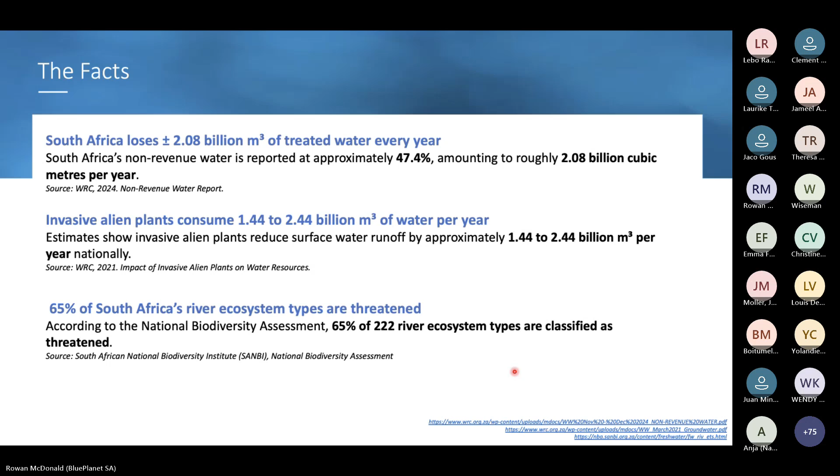This one I didn't have on my radar until I looked this up, but South Africa has lost 35 to 50% of its wetlands. So if we think in terms of our natural water purification and flood buffering, we've lost half of what we had over time.

Another well-known fact that's very integrated with a lot of these issues is 64% of the water treatment works are listed critical. That's back from the 2023 Green Drop reports. We eagerly await the new ones. It's anyone's guess if we're faring better or worse there. In our line of work, we only seem to see the bad ones, and pretty much doom and gloom in terms of the wastewater treatment infrastructure. So looking at those figures, only about 13% of municipal wastewater treatment was meeting compliance.

Microplastics, another big complex issue. We have a lot of primary issues to deal with in terms of wastewater and the environment. Microplastics are another demanding one. Sad to find that in a recent Vaal River study, microplastics were identified in 100% of sediment and water samples.

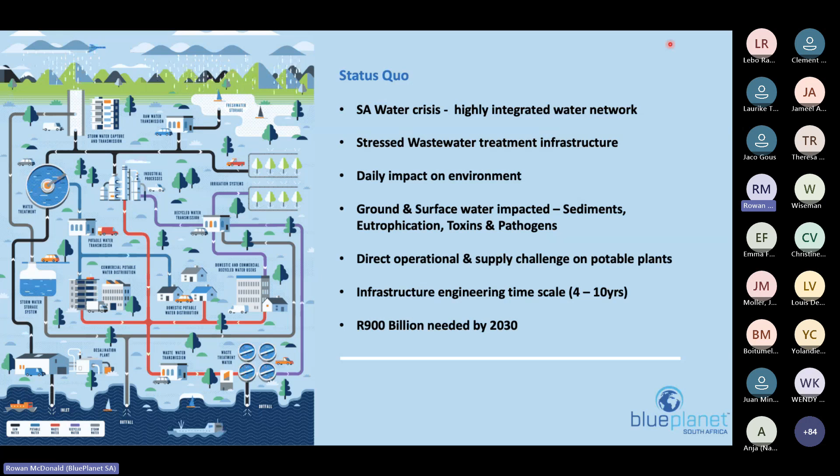So what's needed? Obviously, compliance and enforcement. There's some fairly healthy laws and regulation out there. It would be nice to see stronger compliance and enforcement. For water treatment plants, particularly wastewater treatment plants, we're looking at how do we intensify, how do you make the best of what you have without the long wait for those civil upgrades and massive 10-year construction plans. Is there something we can do in the interim while you wait for the major infrastructure civil works to be implemented?

We're needing solutions on the environmental and surface water side. The eutrophication and pollution of these lakes and dams is critical because of the scale of these systems. It's a challenge, but the cost of sitting back and watching it happen is even greater. So we need novel, rapid deployment, preferably low OpEx solutions to drive change in this water management cycle.

I believe another good approach is supporting decentralization efforts, both in terms of municipal water infrastructure, perhaps own build operate systems for the private sector, as well as a big drive to sewerless sanitation systems. South Africa is quite renowned for its innovation. We do have some great minds in this country in terms of engineering and science, and it would be nice to see more support in R&D and then an unimpeded path towards deployment. R&D is important. Establishing true success and getting validation behind various treatment approaches is important, without having too many stumbling blocks to actually getting these solutions in place and making a difference in the environment.

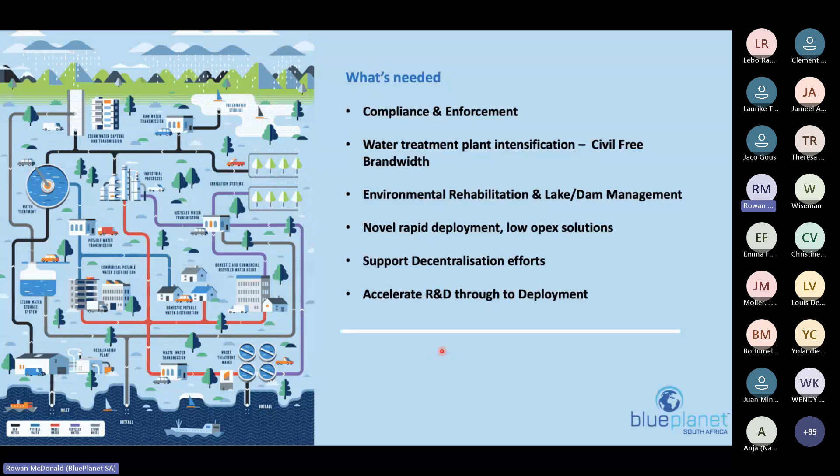So briefly on us, I don't want to make this a long story about our company, but there are some interesting points as to what we had to deal with and how we got to the point where we're working on some of the largest remediation projects in the continent.

So about 15 years ago, Dominic, who's on the call with us, our CEO, had come back from Europe into South Africa and had established some businesses and designs around packaged plants, wastewater systems for remote areas that could recycle water. Those packaged plants, very novel, great idea, worked really well, but occasionally you have severe challenges in terms of what the user base has thrown down the drain. And this is an issue that municipalities and cities deal with on a larger scale.

Debris, foreign objects, etc. are the obvious ones, but what's a little bit more hidden is the cocktail of chemistry that we all throw down the drains. Soaps, drug residues, pharmaceuticals, fats, oils, and grease, surfactants, and even hydraulic stresses from high consumption periods. So when you're in that space, you tend to have what we call bug salesmen come and provide you some magic biology in a bottle or a bag, say throw this into your plant or your lake, and the bugs are going to eat up the problems.

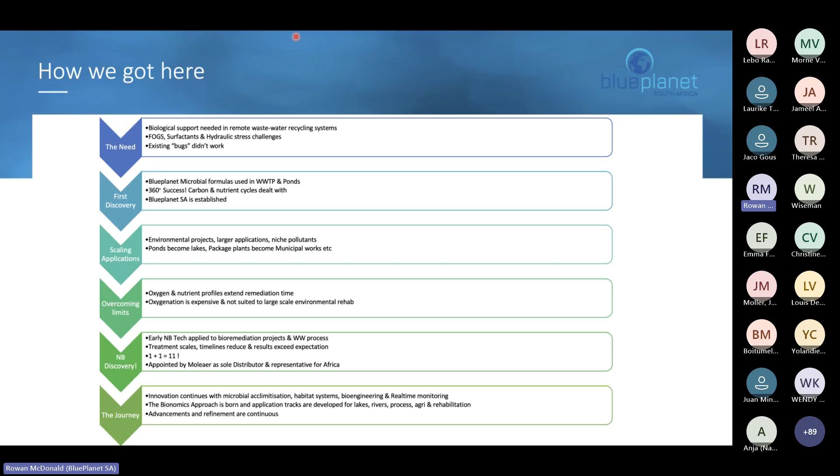So this led to larger and larger projects that were perhaps not feasible becoming feasible, timelines accelerated, OpEx budgets reduced, and the continued development of how we integrate these various technologies got to a point where we were able to start packaging them and still to this day further refine and advance on that theme.

So those learnings and intellectual property, which has been developed by Heiner and team in South Africa over the past decade, is known now as the bionomics approach. The ethos of which is less chemistry, more biology. The vast majority of issues we're tackling come down to biology and how we're able to steer that in the right direction, even in challenging environments.

Most of these applications can become more functional if they're aerobic and provided oxygen. We need to be smart with how we do that and efficient. These tracks are versatile and prescriptive, so no project is the same. But the principles and the core technology set are there, and how we assess, manage, and steer the outcomes of this is where that intellectual property is.

It's obviously very data driven from inception and study of a particular project or task right through to project monitoring, which will adjust the prescription, and finally the outcomes and rehabilitation reports thereof. So we've stacked that into a few key tracks. Bionomic balance is for lakes and dams. This is where we recalibrate the trophic status of an impacted water body.

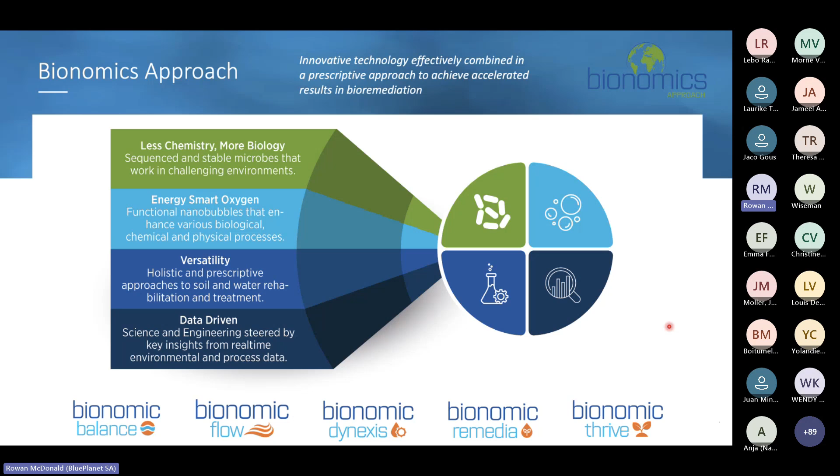Bionomic remedia is pollution cleanup in soils and water, so in situ remediation from chemical and hydrocarbon spills. Bionomic Thrive is these core sets of technology applied into agriculture and soil health. So the core technology stack, which is then custom integrated and prescribed to an application behind this, is our microbial technology, which is known species. We know their function, we know their habitat, and how to steer them into an application for soil, wastewater, agriculture,

or similar. Nanobubble technology, which we'll get into, is the accelerator to all of this, where we can do gas diffusion and create these nanobubbles which stimulate the microbiology. Bioengineering, we bring this particularly into river and lake solutions and pollution control, anything from biologically active weirs, floating wetlands, in situ bioreactors, creating massive amounts of surface area in systems so that we can have beneficial microbial habitat to

restore biodiversity. In terms of the data around these projects and reporting, we work with everything from sonar scanning lake beds and sediment and doing hardness and vegetative mapping through to real-time in situ monitoring in pipe, in plant, or in lakes and rivers, including sediments, drone imagery and surveys, laboratory analysis. We bring this all into a dashboard for assessment, informing the direction of the project, and ultimately the final reporting. Data is certainly key.

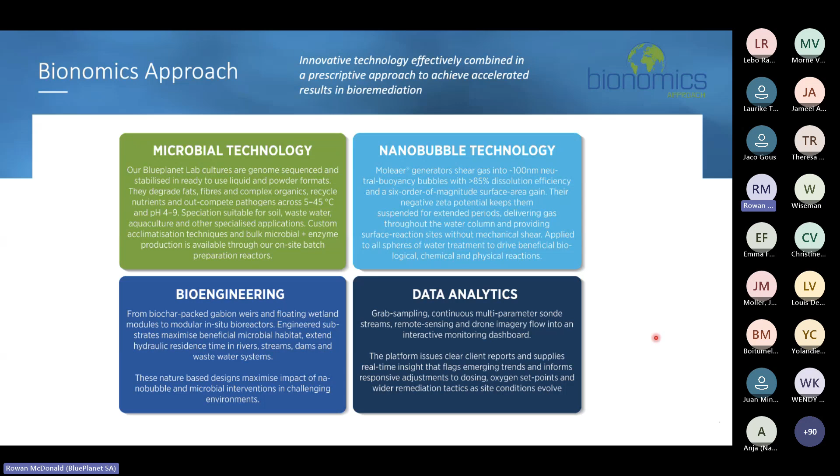So the kind of work that has been achieved with biology and nanobubble oxygenation is anything from large municipal plants that have suffered decay and degradation or not meeting compliance, river systems that have received pollution for a long time and need rehabilitation, large-scale lake eutrophication management, agriculture, and more. We'll dive more into some specific applications later.

Okay, time for a little bit of schooling. These are very complex topics, and I'm sure I have a very mixed audience of skill sets here, where some of this might be well understood and some less so. I'm going to do my best to keep it short, but I'm going to raise a few pertinent points around what to expect from microbial remediation, what to look out for.

So just briefly, what we believe is important and why we've had so much success in the market with our particular product set is we are working with pure cultivations of organic bacteria. We know what they are. This is not some concoction or cocktail that's been created years or decades ago that keeps on fermenting. These are individually identified, sequenced, and libraried microbes.

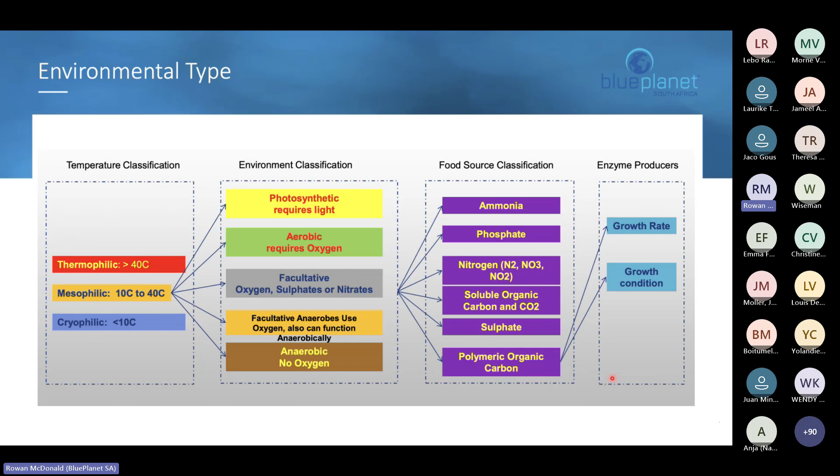So I'm going to get into enzymes now, because quite often with microbial products, or what people might refer to as bugs, bioenzymes, there's a lot of confusion here. So bacteria are living cells that can consume or cycle waste. They replicate and grow if the conditions are correct and if the food source is available. An enzyme does not reproduce. An enzyme is actually the production of a bacteria when there is not soluble food available.

So if you think about the sediments in a lake or sludge in a lagoon system, you have sort of coarse food, that's the sludge and particulate matter that you can see. A bacteria cannot actually make that disappear or eat that. A bacteria doesn't really have a mouth. What the correct bacteria in the correct environmental conditions will do is produce an enzyme that does that first breakdown and solubilizes that food source for the bacteria to then take over.

So if you only apply an enzyme, you will start solubilizing and releasing carbon and nutrient. But what happens next if you do not have supporting bacteria to then complete that process? So just a word of caution, be careful with enzyme-only solutions, because you're not completing the cycle. In fact, sometimes you can have quite severe spikes of nutrients, which create further issues.

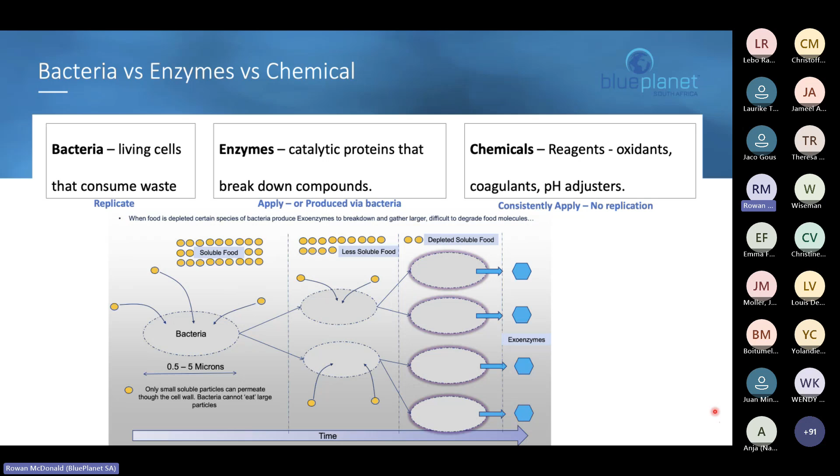We then have the Bacillus army, which does a lot of our organic degradation and carbon-based work and produces some very useful exoenzymes. Licheniformis is a denitrifier to complete that ammonia-nitrogen cycle. And very importantly, the nitrifying species.

If we only had carbon degraders, if I can put it that way, you would stand to have initial degradation, release a lot of ammonia nitrogen into the system, and then what else? So some of these products could create ammonia nitrogen issues. Fortunately, we've got the speciation to then deal with that. Nitrifiers are notoriously slow growers.

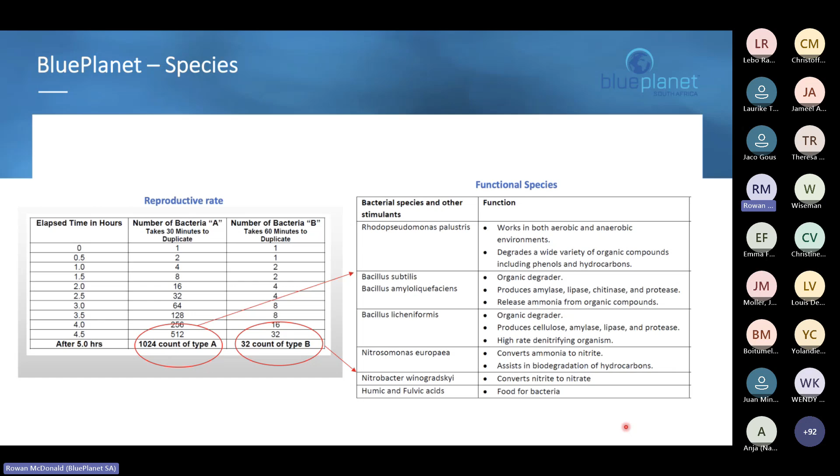So how do you put this to work in the field? Ready-to-use liquid products. This is an easy platform. You get to apply liquid to wastewater processes, irrigation systems, surface water systems. And what we've learned over time is obviously the larger the project becomes, the more biological support we need. So quite uniquely, we offered the Southern Africa market the ability to batch prepare on site. So this is how we scale up this biology.

So we build a bioreactor on site and essentially use the liquid products and some powder products as an ingredient to then grow and multiply the amount of microbes that can be applied to a project. So we're not transporting water around the world or around the country. We're able to do that rapid growth on site, and even acclimatize microbes to specific conditions. So if we're dealing with pH extremes, salts, hydrocarbons, or other toxins, we actually train this microbial community to tolerate and work in that environment. So we customize it to the field application.

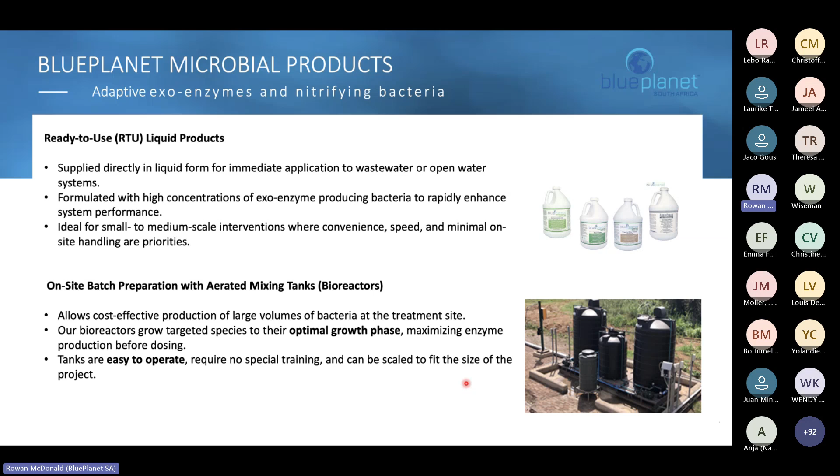So I'm sure a lot of us have had some sort of exposure to purchasing bugs or bioenzymes or some kind of bacterial product. You may have had success, you may have had failures. Unfortunately, there are quite a few failures with these products in the market.

What I think is misunderstood or not regulated in the marketplace is an understanding of what is in that bottle or that pill or that tablet, and how to get it to work. So my advice is, if you're looking at something to use in a particular application, get an understanding of what the species are.

Any service provider worth his salt should be able to give you a list and an analysis of what those species are. Hopefully they explain to you what each of those species are for. If not, you could do your own research on what the functions are. Are they standardized? Are they part of an internationally recognized genome library? Have they been sequenced? Or are they some sort of GMO or unknown?

We would apply caution if there's some unknowns there, or some unexplained species, or something foreign to your particular country or application. So the simplest questions are GenBank numbers and biosafety levels. What is in that bottle, or what is in that powder or tablet? Other questions might be around the pathways.

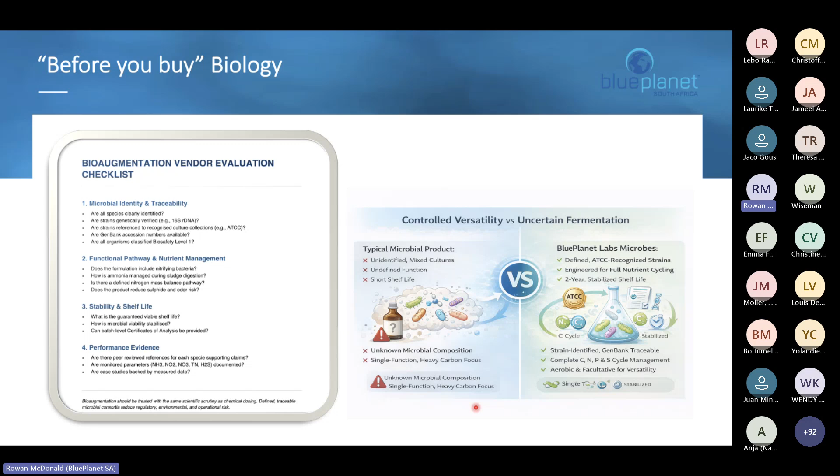All right. Sorry if I try to condense too much into that one, but I'm trying to cover a lot of material here. So that's a focused look at the world of bioremediation and bioaugmentation technology.

There's obviously a lot more complexity to it, but I think what we've shown in field work in South Africa, work with universities and municipal departments, is it can work if you understand your expectations, your environment, and your species choice. Getting those things right is critical. Managing the expectation and supporting the biology. And it's not just about throwing lots of unknown biology at a problem. There is some finesse to it.

All right, so nanobubble technology, this is an exciting one. This is my field. I get very, very passionate about it. This is what stepped up our game and our scale in terms of remediation. The Bionomics model and the use of nanobubble technology has now moved on to establish Blueplanet Germany 3 years ago. We're tackling challenges in Germany, New Zealand, other parts of the continent too. So the integrated approach of how we work with biology and support it with nanobubble technology has really grown leaps and bounds.

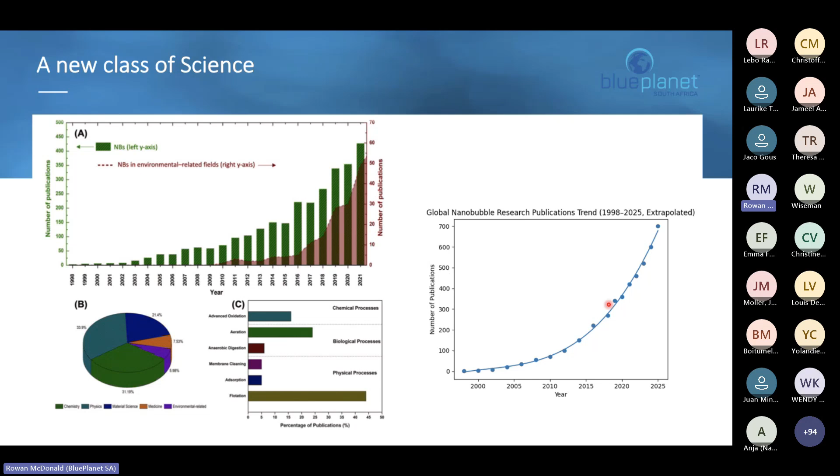A lot of the foundational science is established, and we're more and more learning about niche applications in water and soil. The graph on the right is actually just an extrapolation I did because I haven't got an updated graph here. But as you can see, the science and research is really compounding.

I'm going to do a quick lesson for those who are not familiar with oxygen transfer or aeration. If you do want an aerobic process, or adding oxygen to an application is going to assist that biology, there's a few different ways to do that. The most common is large mechanical aerators that sit at your wastewater treatment plant. Huge amounts of energy, not very efficient at getting oxygen into water.

The next advancement on that is some kind of diffuser. If you can picture your aquarium tank, you've got some sort of bubbling air stone, and those bubbles rise up through the water column. The amount of time those bubbles are in that water column is your chance to diffuse that gas into the water. Deeper water helps because the bubbles are there longer, but you're using a lot of energy and you're always having bubbles pop out. So diffusers are generally only getting about 4 or 5% of the gas into water per meter, and there's a lot of wastage in that.

Cones, or Speece cones, are something the aquaculture industry uses. Very complicated to design, extremely power hungry, and not something you're going to see in a wastewater treatment plant or environmental application. Spargers and venturis, these are better. Some of the most well-designed venturi systems I've seen are hitting 20 or 25%. The rest of that oxygen is wasted back to atmosphere again.

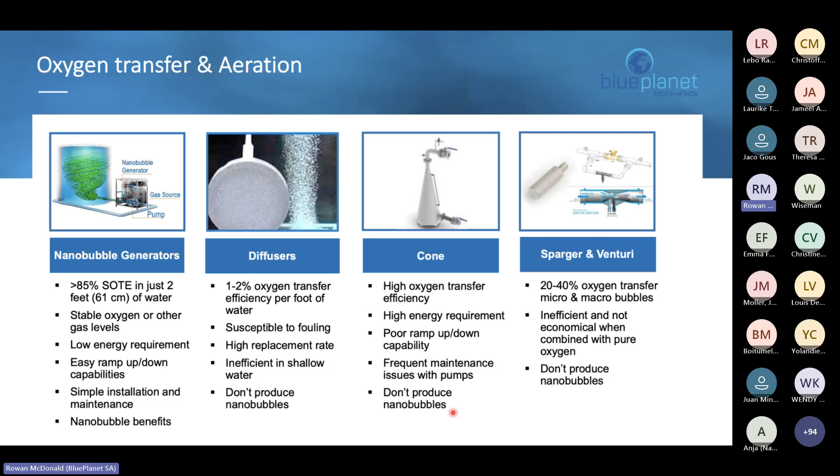Nanobubble technology gives us the ability to dissolve over 85% of that gas into liquid. We're doing this with low energy, simple maintenance, and across a wide range of applications, highly scalable. So efficiency is one of the reasons we use this technology.

To scale this, we're familiar with macro and micro bubbles. Micro bubbles are going to be in your soda, in your Coke, and they will eventually pop out of that liquid. Ultrafine bubbles create a sort of cloudy water. These are much smaller bubbles. They hang in that water for a little bit longer, so they have a better chance of trying to transfer their gas content into the liquid.

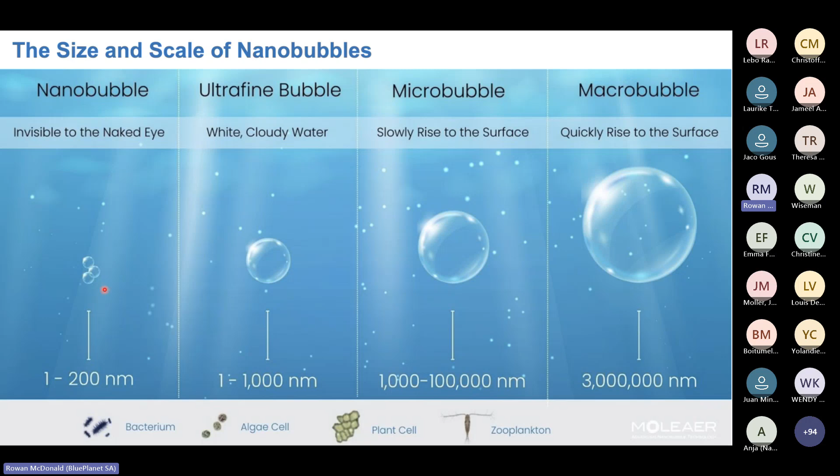So why is that interesting? One of the most defining behaviors around nanobubbles is the fact that they are neutrally buoyant. They don't actually rise out of water. So that increases our ability to have gas retention and very efficiently get oxygen or air or some other gas into that liquid. They're highly stable. They don't rise. They have a hardy surface, high internal pressure.

They are electrochemically active, negatively charged, and hydrophobic. So I'm throwing a lot of terms around here, but really what it means is the bubbles repel and push apart. They will not join up and become a larger bubble. They mobilize really well throughout the water system, the tank, the lake, or the application. They're happy to be at depth in a system.

So if we look at lakes or lagoons where you have sludge and sediments at the bottom, that is typically an anoxic process down there. It's slow, it produces smelly gases. By introducing nanobubbles, we can turn those environments into microaerobic environments, accelerate the decay of that organic matter, and switch off the modes that produce those noxious odors.

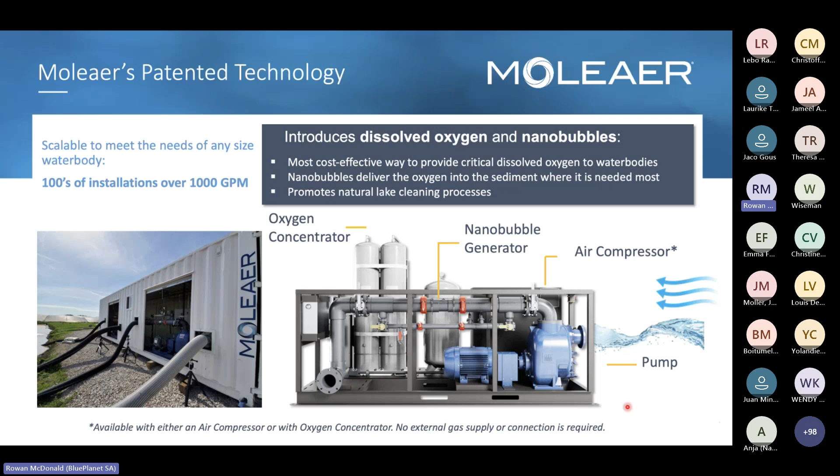To that core, we connect a gas source. This could be air, it could be oxygen produced on site, it could be tank oxygen, ozone, hydrogen, nitrogen, CO2, whatever that gas is that we need in that process. We introduce it there, and we get this dissolving of gas and production of nanobubbles. So the size and scale of this will vary based on application. But in terms of efficiencies on the energy side and mechanical side, it's quite incredible.

So that technology is really doing two things in water management. It is dissolving your gas of choice hyper efficiently, 85% plus transfer. That is quite often a reason to introduce this technology on its own, for its ability to provide that gas very, very efficiently.

Secondly, and possibly more importantly, is the production of these nanobubbles, which behave more like active particles. We're able to enhance and manipulate separation processes, accelerate biological function, strip out contamination, sequester inhibitory compounds. There's a laundry list of what these bubbles are doing beyond just their gas provision. Their physical traits, behavior, and electrochemical reactions are immense. So we've got to remember this is not just about oxygen or not just about a bubble. It is about the way these bubbles behave and how they're able to enhance various processes.

The other thing that helps nanobubbles be so functional in biological and separation systems is obviously the scale, which results in this incredible interfacial surface area. What I mean by that is the interaction potential, the ability to react with a fine contaminant, a solid, a nutrient, a bacterium, a sediment. There's so many of them, and they are actively charged. They want to interact with the components or the stuff or pollutants we have in the water and or soil.

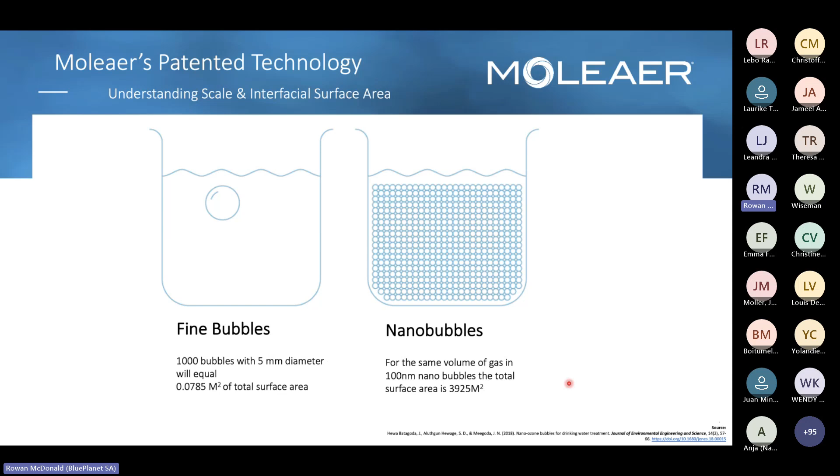So this speaks to the efficiency around the gas, but so too then the physical, chemical and biological interaction potential you have in a particular application. So the scale completely changes here. We're doing essentially more with less in terms of that gas and mechanical input.

So the world of nanobubbles is very exciting. I would encourage you to look up a few papers, particularly in your specific fields. Please do reach out to Hannah or myself after this if you've got questions for your field. And chances are there's probably a paper on it somewhere by now.

It's used, like I said, even up through to the medical industry and drug delivery, which is more emerging. But we're seeing very interesting applications like surface cleaning, where the hardy nature of that bubble itself is actually able to scour and clean a surface like a tank or pipe or food material without chemistry. Just using an air or gaseous bubble is actually giving us the cleaning effects. Water mobility, dispersions, a lot happening.

We tend to focus on its use for gas transfer, microbial process and stimulation, and what we can do in separations. Because really, these are the real drivers behind water and soil rehabilitation.

Right. I'd like to talk a little bit about the water cycle and surface water. So we've got a lot of impaired water bodies, not just in South Africa, but even Europe and US are also facing this crisis. Man-made activities have sort of overwhelmed the natural cycle in these water bodies. We're seeing it happen in real time in the country, things getting worse, but it's also been happening for decades.

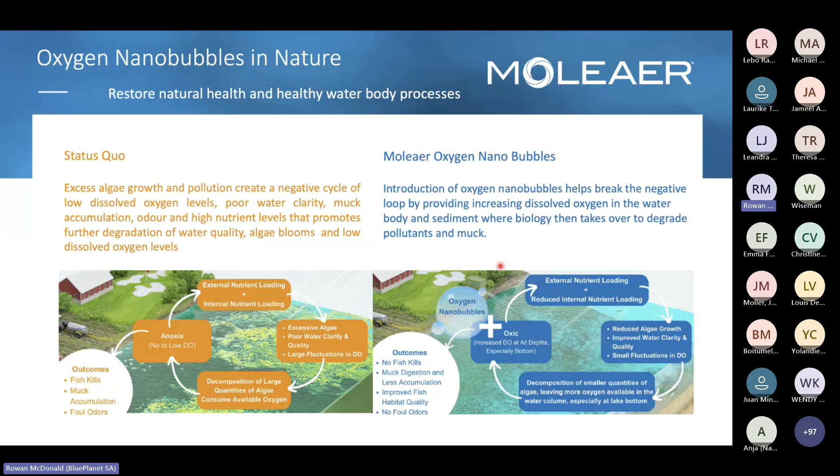Fish waste and decaying leaf matter. The biology is there in a healthy system. Our surface water systems have lost that ability. So just briefly, key nutrients, the nitrogen and phosphorus challenge, this is the main one. So you have all of this coming in on a constant basis.

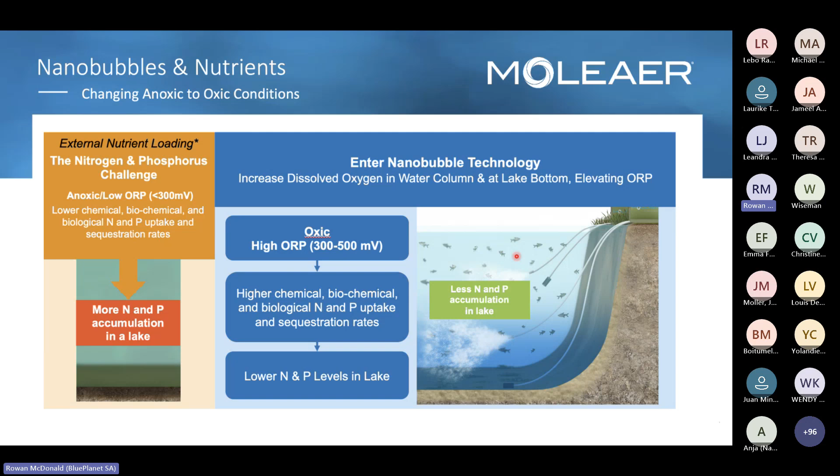By keeping that water body oxic with a healthy redox level, we're able to enhance the biological cycling of ammonia nitrogen and support phosphorus uptake through biology, but so too sediment and lock up phosphorus levels. So phosphorus is a persistent thing. What we want to do is get biomass to take it up, and what's not taken up, you want locked up into the sediment. You don't want it coming out again. This is the way a healthy lake works, and this is what nanobubble injection restores in a lake system.

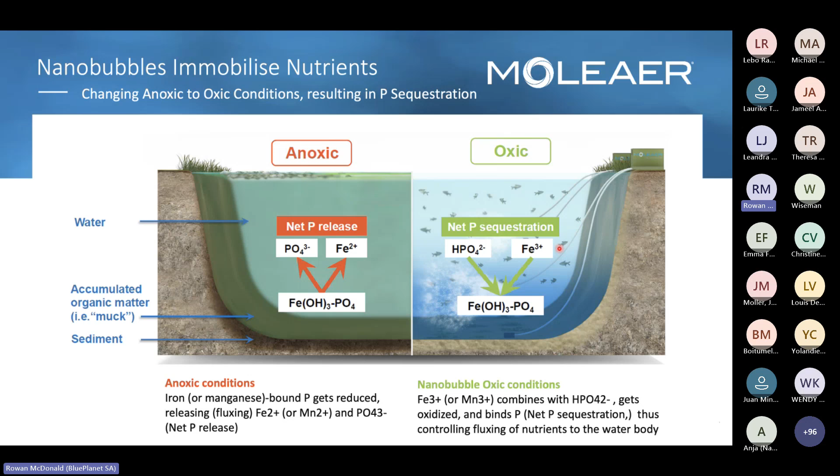So yet again, just talking about back to sort of biology, if you were to throw a lot of unknown enzymes or bacteria into a system, you might start breaking down organic matter and releasing ammonia and phosphorus. That's then going to trigger a bad cycle of algae blooms and invasive weed growth. If we keep things oxic throughout that water column, top to bottom, through the use of oxygen nanobubbles, we will naturally sequester and reduce those phosphorus levels and cycle the ammonia nitrogen.

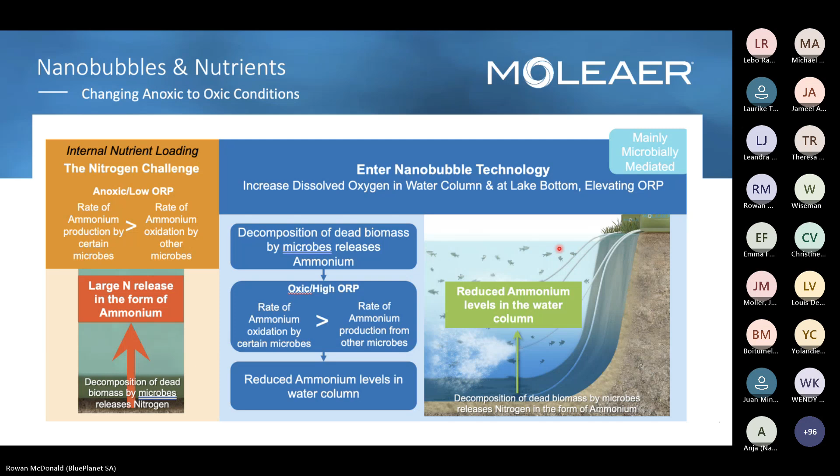So we give the biology the helping hand it needs, the tools it needs, sort of the paycheck for the bacteria, and they're able to get to work and do what that system is supposed to do, which is take that ammonia and ultimately gas it off as nitrogen. So we're able to do this in virtually any scale water body with shore-mounted equipment, supporting microbes.

It's about breaking that cycle, turning back the clock, dealing with the issue from sediment to surface. Sediments are a key contributor to our issues. Putting an aerator at the top or throwing some reagents into the water and sort of bringing all that sediment up can be very, very problematic. We've got to take care of that water body from sediment to surface and really just adapt and restore the function that water body is supposed to have.

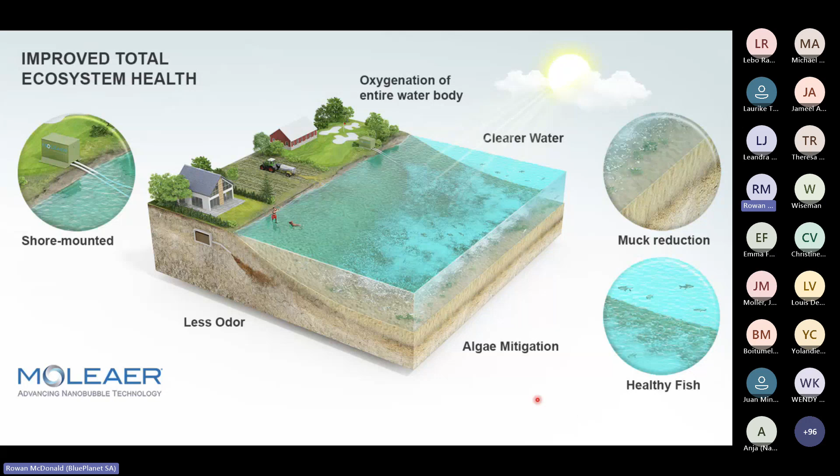All right, moving on to a little bit of wastewater quickly. We see obviously a lot of challenged wastewater works. If you look at a wastewater treatment plant that was designed 40 years ago, they might have designed that plant for 400 or 500 COD, milligrams a liter, and maybe it was designed for 20 megaliters a day. That plant is now receiving, for example, 1,000 COD, and maybe it's not even hydraulically challenged. Maybe it's still running at 20 meg. But our wastewater as humanity has become more difficult to treat.

The reason it's become more difficult to treat is our chemical consumption. We look at not only food and manufacturing industry, and the sort of cocktail of chemicals they need to use to disinfect and keep things clean, but so too our own homes. We can think back to the days where we might have had a bar of soap at the sink or the shower. Now everything's liquids. My wife has got 8 different lotions and potions for hair and body, and these are all going down the drain. They've all got surfactants in them, and they upset process.

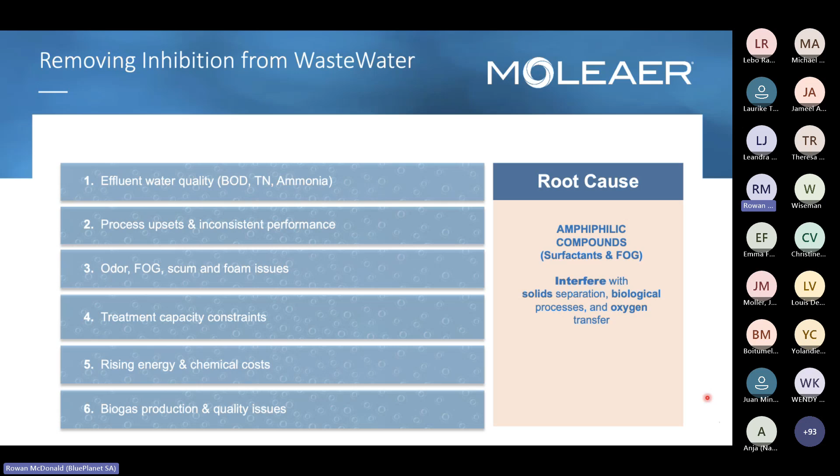A surfactant's job is to encapsulate and remove soiling. That's the opposite of what you want happening in a wastewater treatment process. A disinfectant's job is to kill bacteria. That's the opposite of what you want happening in a wastewater treatment process. So the water has become more difficult to treat. The biology is sensitive to this, and the plants are not operating the way they're supposed to.

We learned we can use nanobubbles as a sacrificial particle. We inject nanobubbles into raw wastewater before the biological treatment process starts. A surfactant has a hydrophilic head and a hydrophobic tail. The nanobubble acts as a collector of these compounds. It reaches the destabilization point and ruptures that surfactant. So that surfactant now does not impede the bugs in the biology that are going to do the work for us. The surfactants also reduce aeration efficiency.

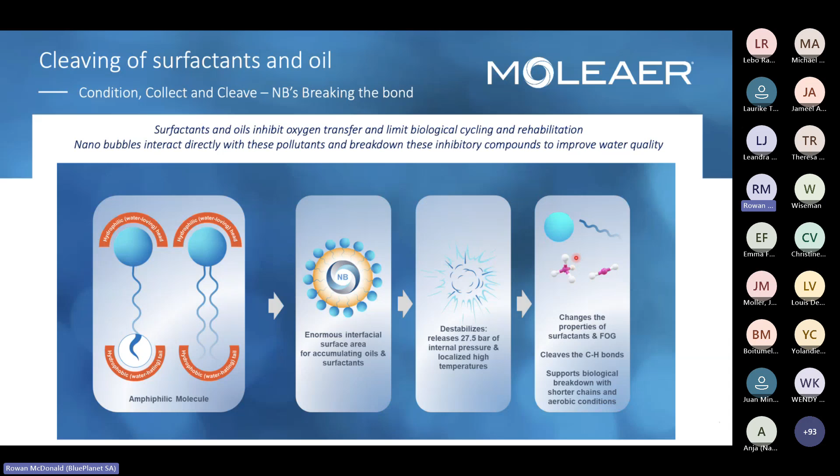So if you have an under-aerated or low DO wastewater system you're struggling with, a lot of the time, the culprit is actually the surfactants and FOGs that are in the system, impeding the transfer of oxygen to biomass. Yet again, nanobubbles get to work, sequester that issue out for us so that the rest of your process is able to work the way it's supposed to.

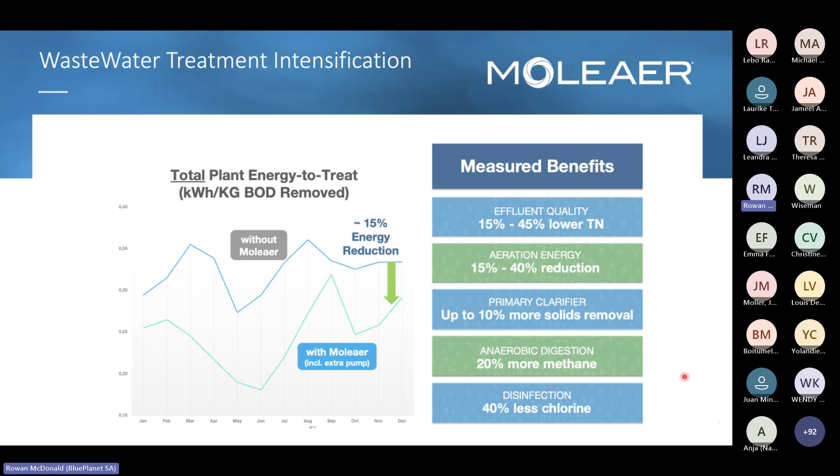What that means in industrial and municipal wastewater treatment is better total nitrogen removal, potentially up to 40% less aeration, better solids removal, better separation, even anaerobic digestion. And finally, we're seeing less chlorine use at the tail end of these plants because those surfactants were actually quenching chlorine consumption right at the end, because the majority of the surfactants will pass through the process.

Nanobubbles are getting adopted in irrigation and distribution systems because they manage biofilm and scaling. So these little bubbles are happy to line up on surfaces. They react with biofilm accumulation in pipes so that you don't have that fouling. This helps farmers and irrigation schemes a lot. Similar story with scaling.

Soil application: reducing water surface tension with these bubbles, getting better permeability through a soil profile. So Heiner might speak to this when he talks about some of our hydrocarbon work, where we see this in agriculture, we see it in remediation work. We're able to mobilize water, get water to transport through soil better, break up compaction. So you get better water use out of that and better transit through to the root zone.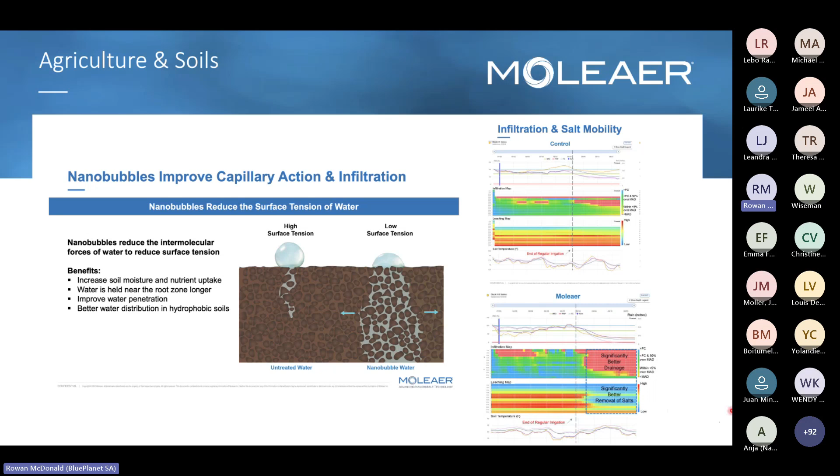Nanobubbles will collect, mobilize, and sort of relocate salts. So if you have compaction or ionic stratification in soil profiles, we're seeing success with nanobubbles breaking that up and relocating or immobilizing those sort of salt accumulation issues.

All right, on to some case studies. Hartbeespoort Dam. I think some of you might have heard about this project. I will give you the condensed version. Magalies Water was contracted to run a multidisciplinary project. One portion of the project was looking at different ways to manage the internal and external nutrient levels of the dam. Obviously, the big visual case for everyone is the hyacinth coverage or the algae blooms. Root cause is obviously the nutrient. So what novel ways are there to deal with nutrient? So enter the Bionomics approach by combining nanobubbles and the correct consortium of microbes.

Importantly, this was a pilot on a particular zone of Hartbeespoort. Unfortunately, the public was expecting or hoping that one small pilot was going to fix the whole dam. That was never the case. What it has done, though, is given the utilities and powers that be the confidence in a long-term study to see the change, see the impact.

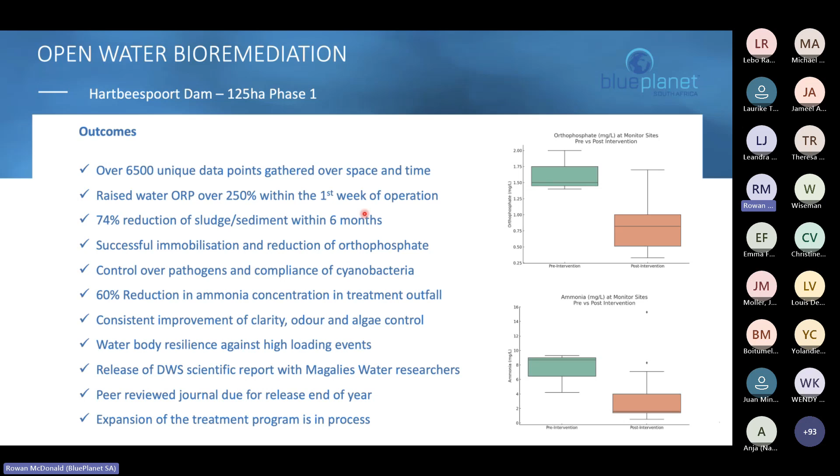So what we did over that period was achieve measurable reductions in key nutrients like phosphate and ammonia. An immense amount of data was built up. We saw very encouraging changes to redox and dissolved oxygen. Just jumping back, we actually saw major reductions in organic sediments, as much as 74%. So giving us more water column and less nutrient flux. And this is all still biologically linked. At the end of the day, we're sort of detoxifying that water, getting the biology to work again, and arresting the internal nutrient release issues.

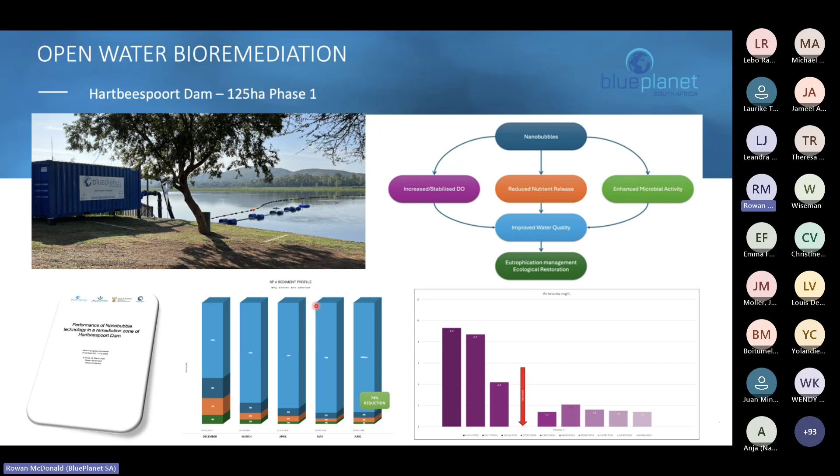The findings of this actually exceeded our expectations in terms of the zone. We have seen overall improvements right through to the dam wall, despite the incoming systems actually getting worse. So the Crocodile River has gotten worse, not better, according to Magalies Water's data. But despite that, we've still seen positive trends in that water body itself. And pleased to say the pilot is continuing. There will be further expansions on this program into Hartbeespoort.

We do need to have context for how large and how complex that system is. It is not going to change overnight. This is a program that spans many, many years. It could condense in time with additional inputs and budgets, but the expectation is this will be a program that exists over many years.

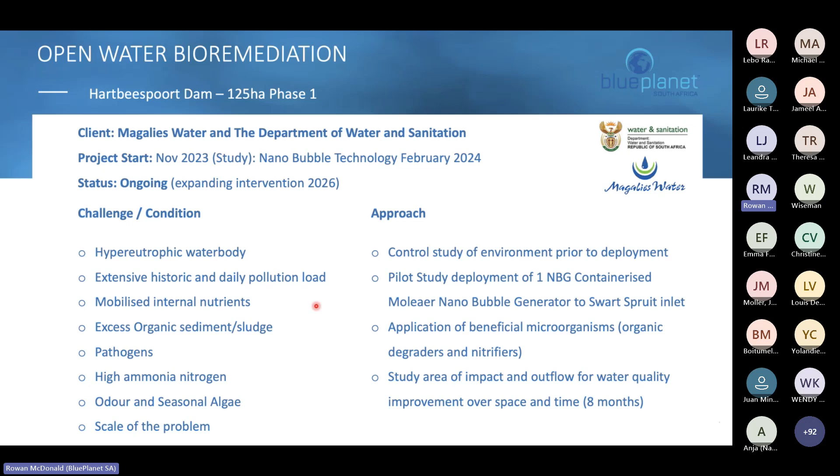Roodeplaat Dam, this was an incredible project. We kind of got approached by World Rowing. Roodeplaat was set to host the first World Rowing Masters Regatta on African soil back in 2023. And there are 2 wastewater treatment plants directly impacting the dam. It's got a long history of eutrophication and problematic algae, and water quality spiraled out of control leading up to the event. So about 3 months before, we were contacted to say, can you pull a small miracle off here?

There's 3 months to go. And they were failing on E. coli and various other parameters. And that prestigious event that the city of Tshwane and the country was very excited to hold was under threat. Blue Planet got to work. We sort of threw everything we had at this, ran a really, really intensive program.

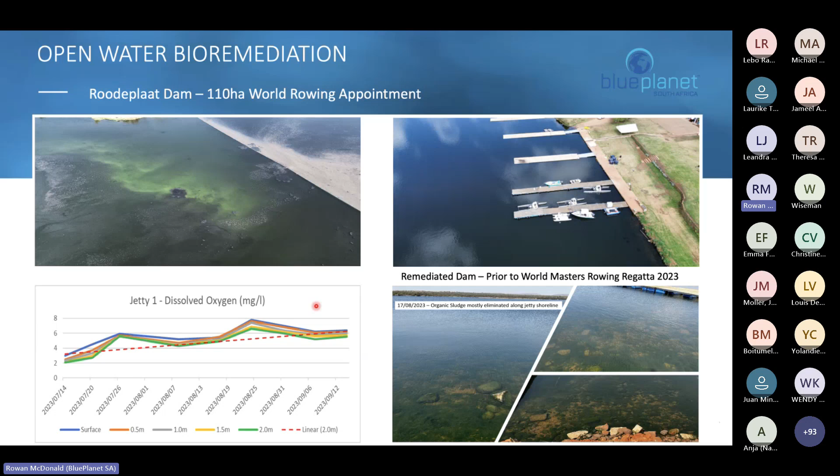I think it's managed to give Heiner a few gray hairs as well as everyone else. It was sort of round-the-clock effort for weeks and months on end. And yeah, managed to save the day despite huge activated sludge ingress from a wastewater treatment plant. It was the height of load shedding, sludge spills were occurring, everything was against us. But combining nanobubble technology and the right consortium of bacteria and enzymes, we were able to get things in control and get them in compliance for that event.

So yeah, that was sort of the first big public project that gave people some awareness around the technology and the approach, and things have grown since then. So yeah, that was one of these sort of short-term interventions. Unfortunately, that was limited to funding. We contributed, some other consortiums did, to try and get that done. Unfortunately, budgets for continued management of the dam as a whole have not yet come about. So the treatment effects were limited to the event, and to this day are sort of around the jetty zone.

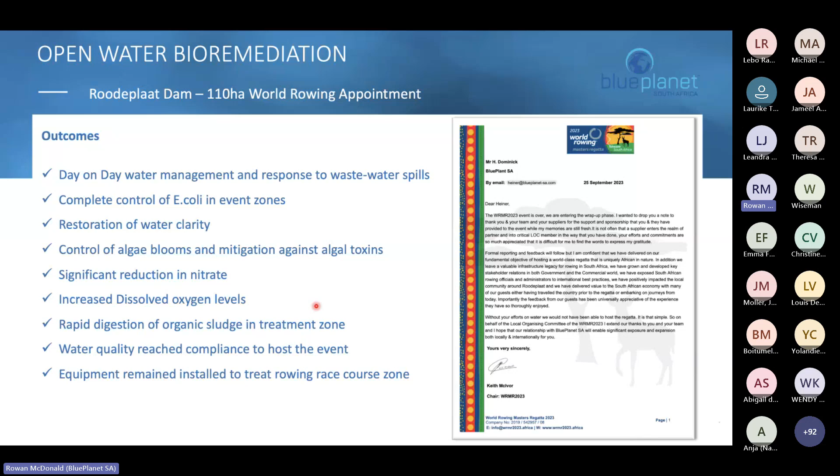Sorry, Rowan, you asked me to give you a 15-minute heads up. All right, thank you. Thank you very much.

All right, so another interesting project. Lakes and dams are one thing. You have a certain amount of retention. What if you have a flowing river? A really, really toxic soup of sewage and chemistry. This was the case for Greenways Golf Estate in Strand, Western Cape. I arrived to this middle picture. The Soet River is severely impacted upstream by an informal settlement that particularly sprung up over the COVID period. There are no services there, so the river is used as a sanitation dumping ground and debris dumping.

This then carries on down through some underground culverts. It affects a few communities before that, and then pops out at Greenways Golf Estate, which is a coastal golf estate. Picture yourself retiring, going down to the coast, setting up home in a lovely golf estate. You take your grandkids fishing in the river. Life is grand 20 years ago. Over about the past 6 or 7 years, this river has turned into a septic, very sort of dangerous system. Residents were having to close up keyholes, and were putting towels below doors to prevent the noxious odors coming into their homes. The river was completely dead.

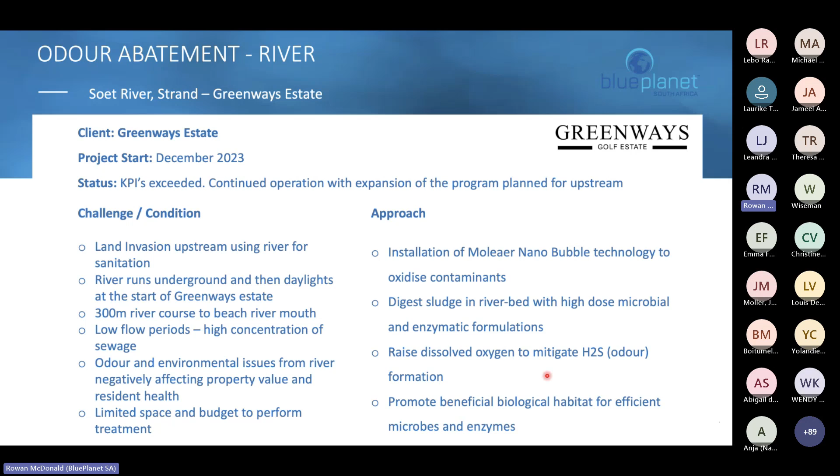So very challenging conditions, not a lot of time, not a lot of budget, but we managed to make a big difference by using novel bioengineering techniques, the right approach with technology and biology, for the residents and the ocean. So we did quite a bit of recirculation. One example is pumping water from the lower end back up to the start. We constructed a biochar activated filter pond. This is where we keep most of our biological activity alive. Another challenge we have is salinity ingress. So the tide comes in and we go from low saline to high saline.

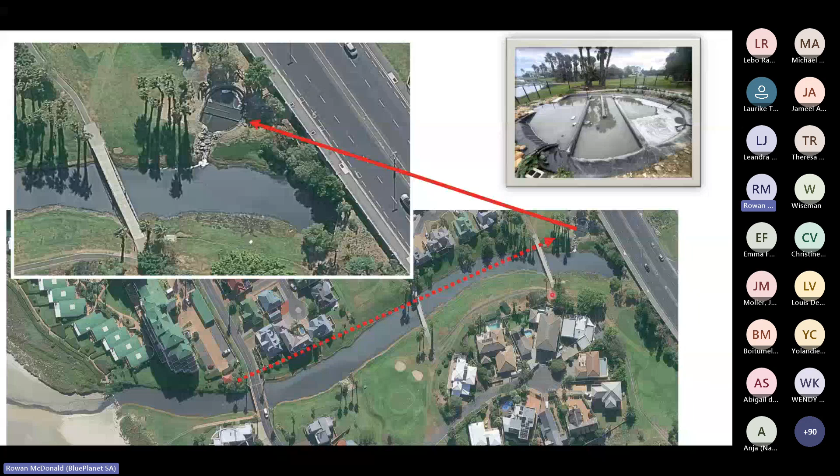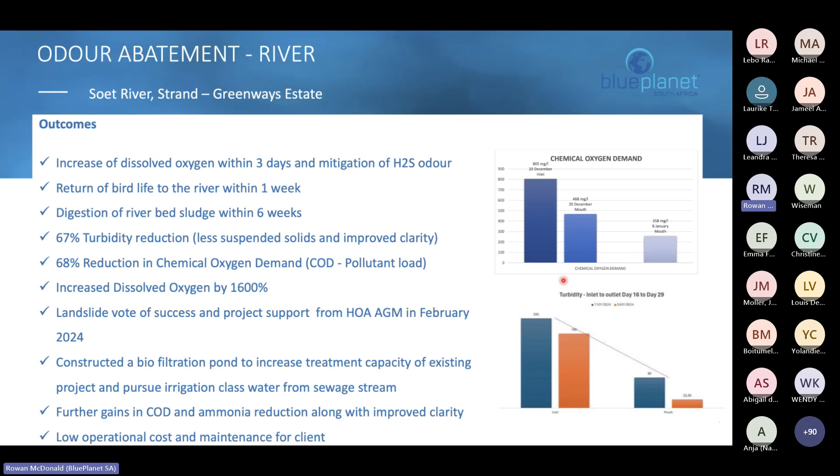We established this pond, introduced nanobubbles, microbes, and have some retention with biochar. This got them the abatement they needed and fairly serious reductions to critical water quality parameters. It got the attention of the city and other stakeholders and catchment management forums. I'm pleased to say these programs are now being expanded and rolled out. What started as a small niche challenge scaled and grew in terms of outcomes and expectations, and we're now working on much larger projects with certain municipalities.

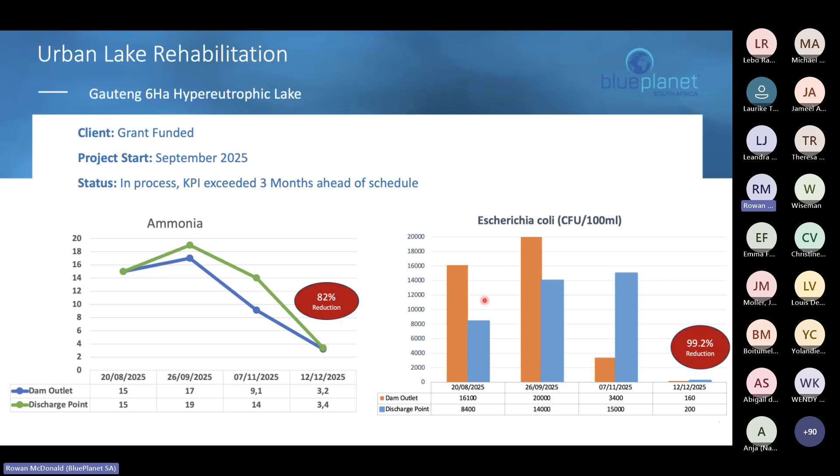Another quick example - I can't name this lake yet, it will become public in the next few months, but I couldn't resist sharing some data insights. It's a 6-hectare hypereutrophic lake. We deployed oxygen nanobubbles and our bionomic balance strategy. In a short space of time: 82% reductions in ammonia, 99% reductions in E. coli, and a complete shift in oxygen and redox dynamics.

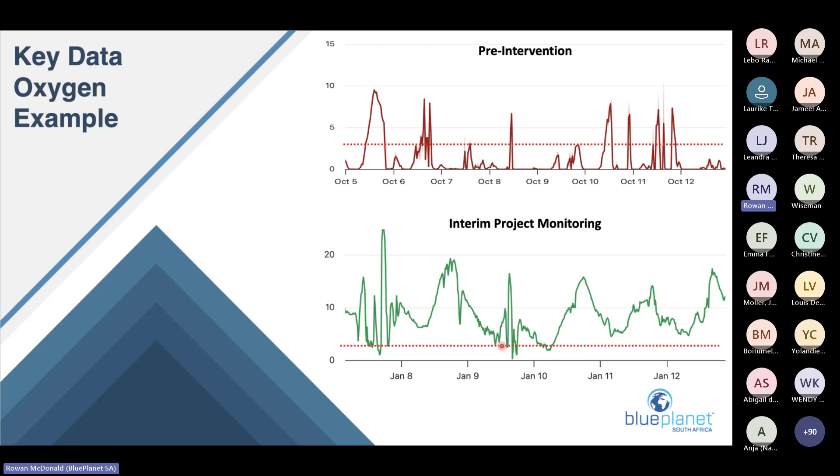Here are some real-time monitoring snapshots over a week. If you look every day, that lake was spiking in dissolved oxygen thanks to photosynthesis and algae, and after hours it was crashing - every single night, just before dawn, virtually zero dissolved oxygen. Can you imagine the stress on the species and biodiversity going from high to zero every single day? Halfway through the project, this is what dissolved oxygen looks like - we're keeping virtually everything above the anoxic zone, and this curve is just improving all the time.

At this point, I'd like to ask Heine to talk about some of his projects here - he knows them better than I do. Heine, are you available now?

Good morning everyone, let me jump straight into it. This was a project conducted for Anglo American at the Nyl Dam, part of their biodiversity offset area. The dam has been historically heavily impacted by the Mokopane wastewater treatment plant, depositing some 7.5 megaliters a day of very poorly treated, and in a lot of cases untreated, wastewater into the dam, resulting in a very large fish kill and the dam turning eutrophic, hypereutrophic.

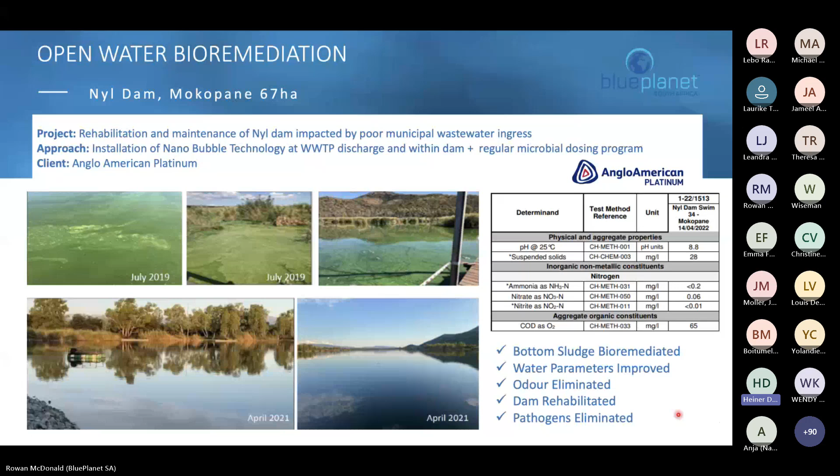Nanobubble technology and a biorem program was implemented both at the wastewater plant maturation ponds and at the Nyl Dam, and within a 6 to 7 month period the dam was back to its natural condition. There's an ongoing program at the dam to ensure it remains pristine. One of the biggest challenges was the amount of bottom sludge accumulation within the dam from overloaded maturation ponds, and during every storm ingress into the wastewater treatment plant, the blowouts that occurred were ending up in the dam. The water results show the quality of the dam - this was in 2022, but the results are very similar today.

Next one please, Rowan. We'll talk a little bit about hydrocarbon spills. We focus on very remote hydrocarbon work, basically where it's impossible to remove soil from a site.

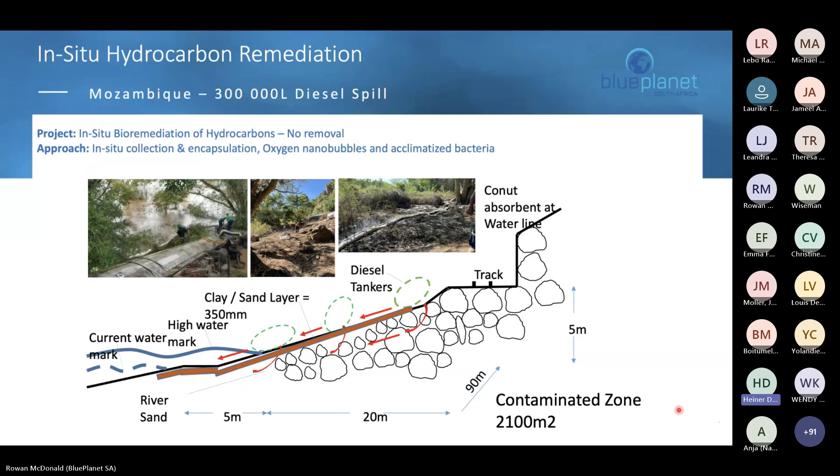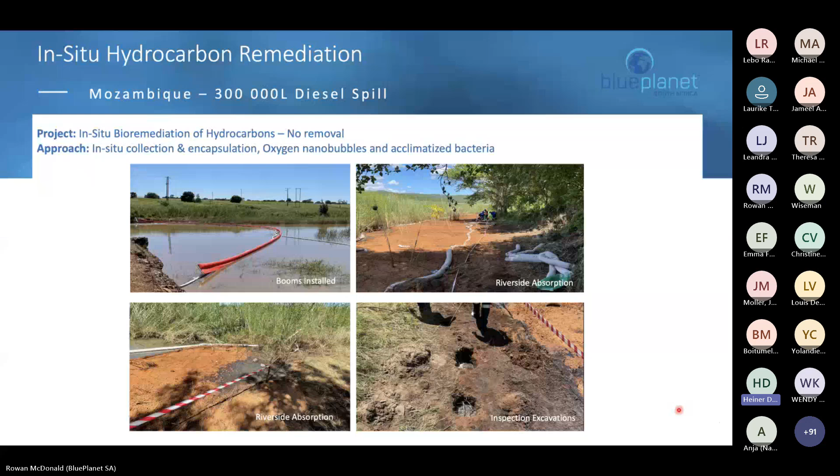This case here in front of us was in Mozambique. It was a 300,000 litre diesel spill from a train derailment - a train falling down the side of a hill into a very remote area on the riverbanks, leaching the diesel into the substrate, into the soil, into the rock bed of the tracks, and then down towards the watermark. Some of the diesel made its way downstream. This needed booms to be installed to contain this and bring it to the side, where we used coir to absorb a lot of this product before bioremediating the area once the floodline had receded, as this event occurred during heavy rainfall.

Based on that, the program was developed to deal with the hydrocarbon contamination. A grid drilling program with augers was implemented, and a flush with a hydrocarbon encapsulator was undertaken, encapsulating in a silicate, after which a pH correction was done, and then oxygen nanobubble water together with nutrients and a bioremediation program. Once this carbon, nitrogen, and phosphate balance was achieved, we were able to bioremediate this in situ in a period of 4 months.

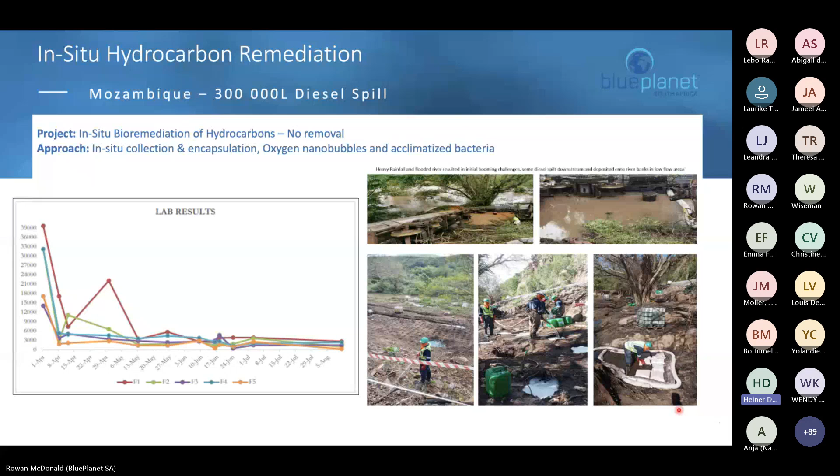A similar occurrence was in Komatipoort, another train derailment - actually an accident, 2 trains collided. This was back in 2023, and exactly the same occurrence happened - a very similar plume, only here there were wetlands along the side of the river, reed beds, and shallow water. That took a bit of a different approach, but we were also very successful in remediating this, again by applying a number of technologies. Here we can see the damage caused to the environment and the seepage that took place, entering into the river, and then this would seep downstream and affect the Kruger Park.

Next slide, please, Rowan. Here's some of the surface applications that we did using encapsulation technology, both in the wetlands. This product does have a very high pH, so that needed pH correction again after the program, after which a microbial bioremediation program was applied. We also did build trenches, line trenches, to stop any seepage down to the river and the wetlands areas, and that was then removed from site using absorbents to take up whatever hydrocarbons were left in the process.

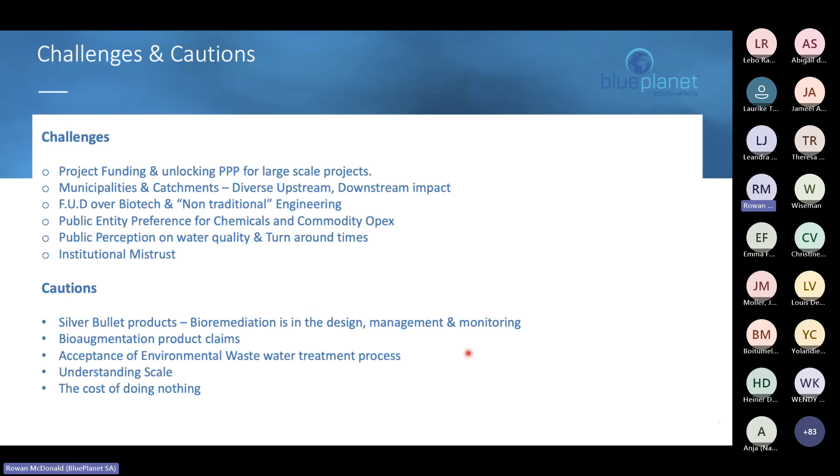What is the cost of doing nothing? Quite often the answer to that is the costs of sitting back and waiting are compounding, making these rehabilitation efforts even more costly.

I'm not going to run through all of this, but just so you know, things we're currently busy with or working on: mass adoption of nanobubble pre-treatment into the municipal industrial wastewater sector to basically get those plants to do more with less, whilst we wait for those long engineering timelines of upgrades and new works. We've developed and are looking at implementation of our pre-oxidation strategy to save drinking water plants from eutrophic sources, larger and larger lake and dam projects.

I've got a keen interest in looking into scaling and optimizing particularly constructed wetland footprints. Constructed wetlands are an excellent form of nutrient removal and water treatment. However, we often underestimate the footprint behind these things. And it's looking like some of these approaches could potentially reduce the footprint of constructed wetlands by 75%.

We want to see more and more data out there, getting real-time monitoring into public water systems and waterways, and getting communities, public and service providers having access to tangible trending data in virtually real time.

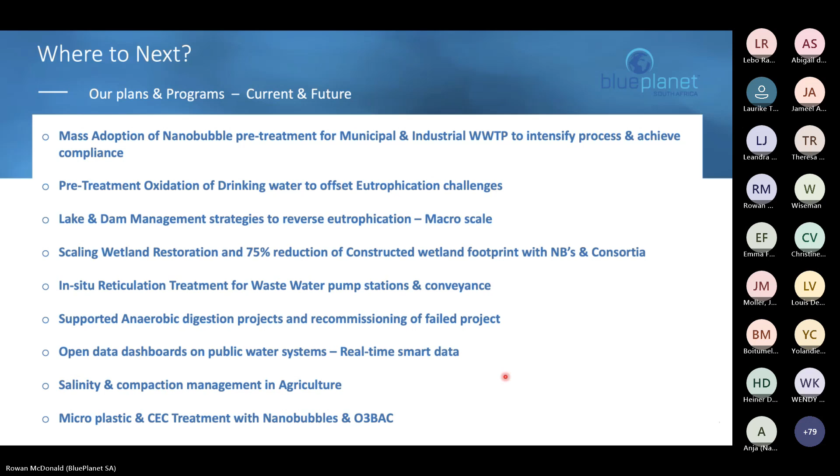All right, that is me. I'm just leaving this one slide just to remind us that nanobubbles are unique. They don't rise out of water.